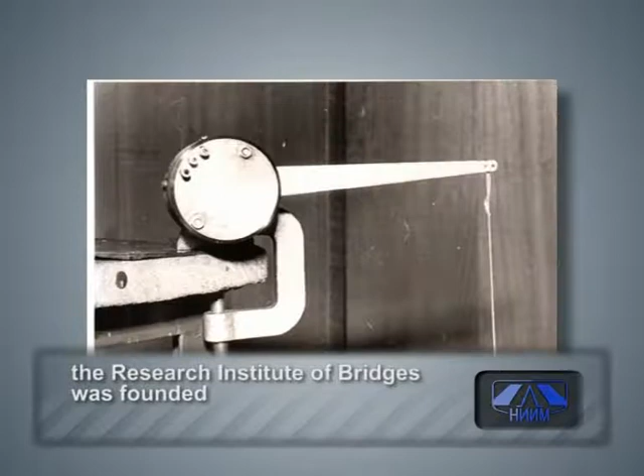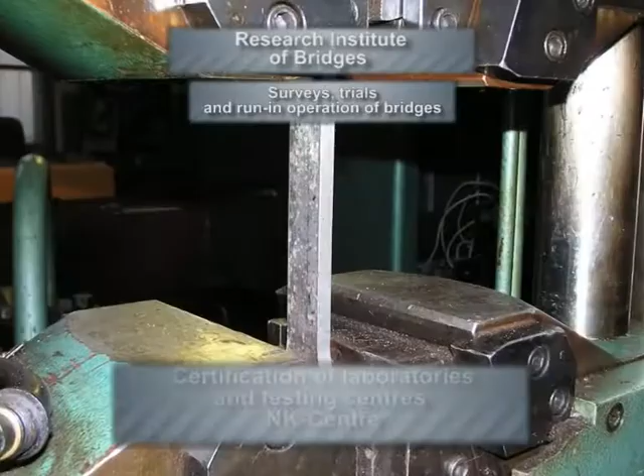Today, the Research Institute of Bridges is one of the leading experts in the industry with multi-profile activities. The Institute has modern laboratories and unique equipment promoting high level of the researches and developments as held in designs, operation and construction of the engineering structures, creation and expertise of the methods, facilities and technologies for non-destructive testing of welds and critical structures in railroads.

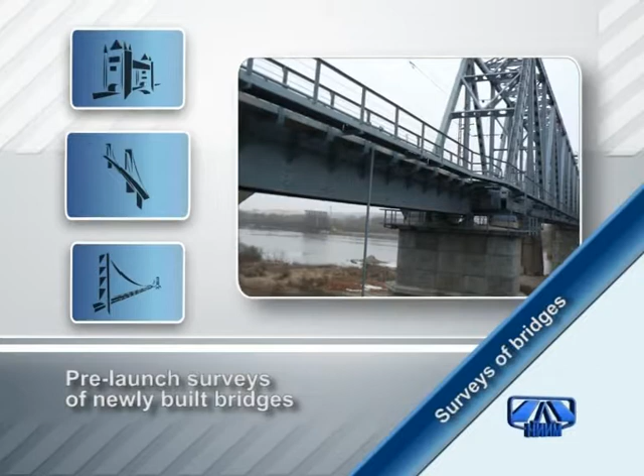The field works to survey and test bridges, diagnosing and expertise of the engineering structures require ultimate concentration from the employees. Future safe operation of the structure depends on the modern equipment and people's teamwork.

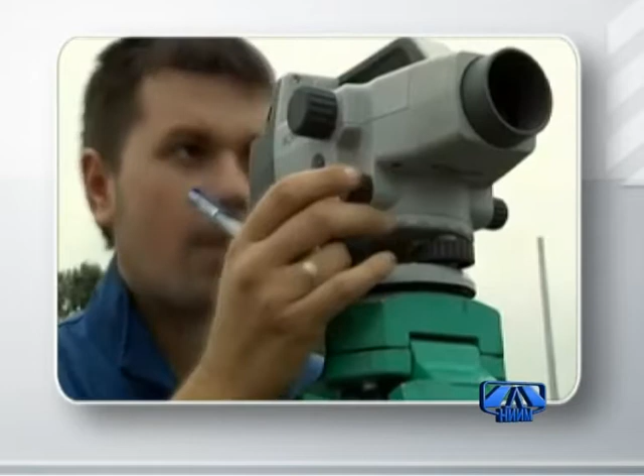Since its establishment, the Research Institute of Bridges has got 37 patents for the methods and devices to base innovative equipments and technologies intended for diagnosing of engineering structures and non-destructive testing of the rolling stock and railroad infrastructure parts and components.

The Institute has developed the main industrial regulations for application arrangement and technology of non-destructive checking applied in repair of the railway cars and operation of railway equipments.

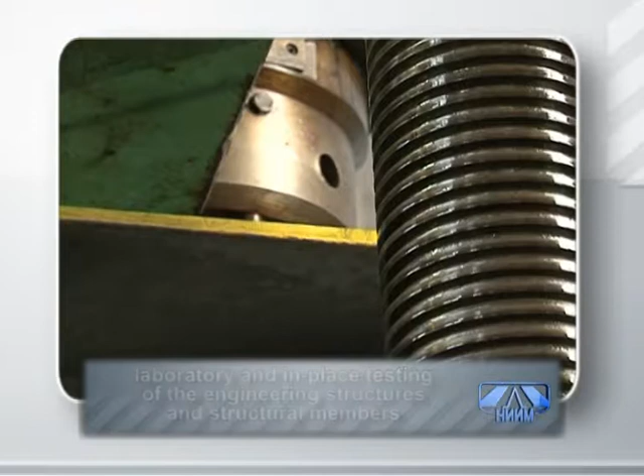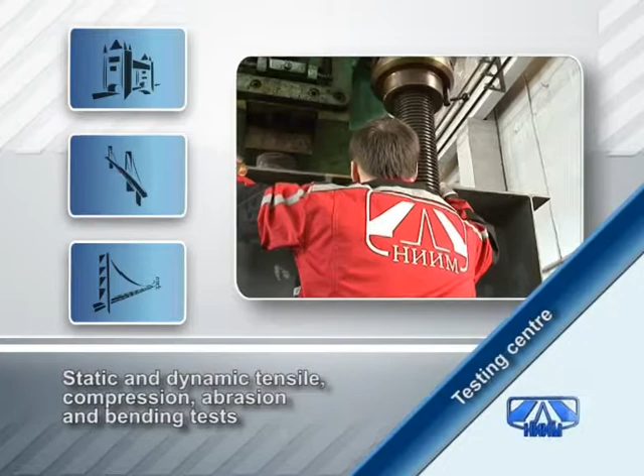In the laboratories of the Research Institute of Bridges, the elements of railway cars, truck structure, structural parts including large-scale superstructure fragments are tested for static and dynamic loads. Seismic resistance, brittle fracture, including that under sub-zero weather, stressed and deformed conditions are studied as well as fatigue developing under such conditions. The data received bases the subsequent engineering calculations.

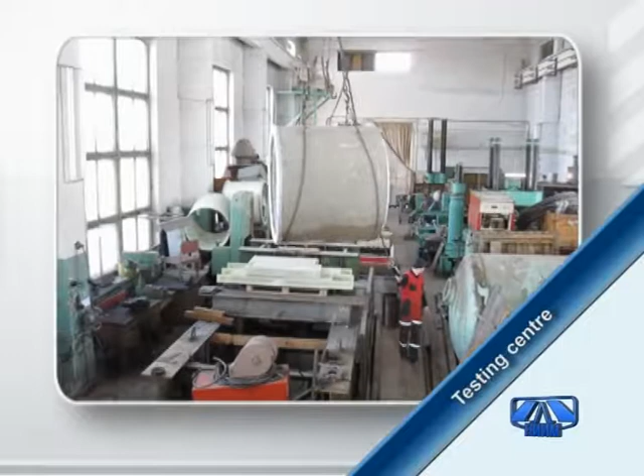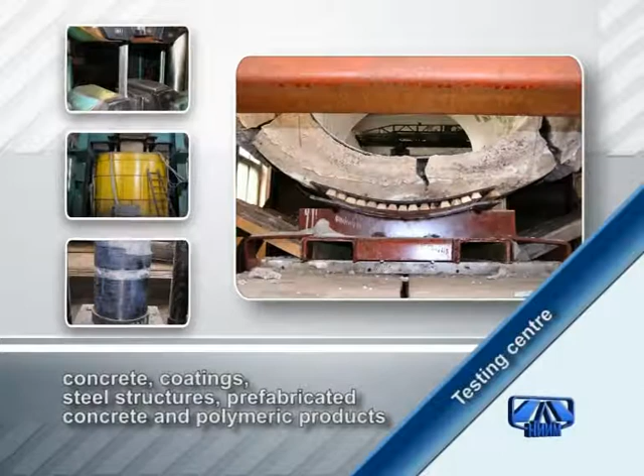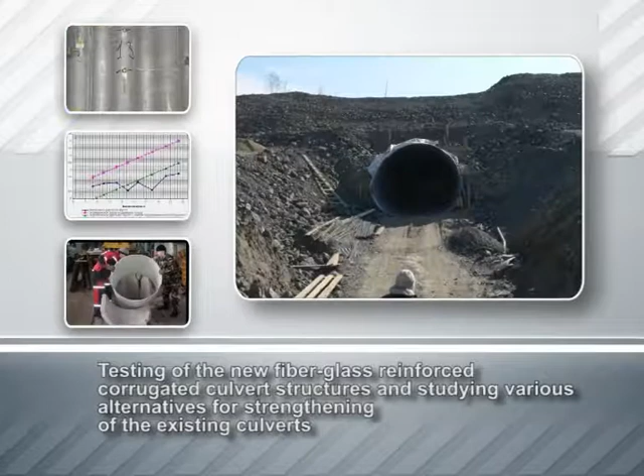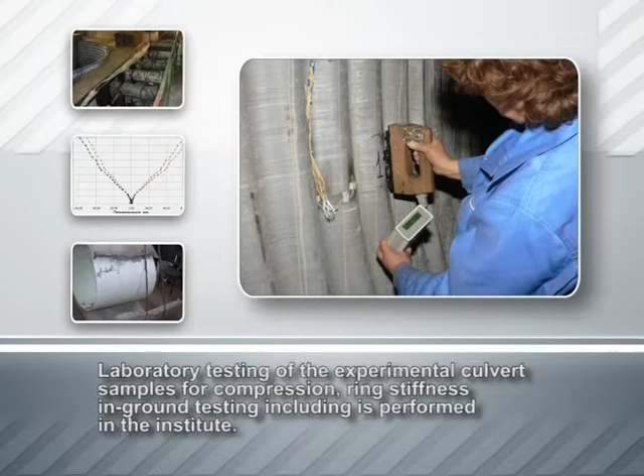Testing of the new fiberglass reinforced corrugated culvert structure and studying various alternatives for strengthening of the existing culverts using innovative methods make another area of the Institute's activities. Laboratory testing of the experimental culvert samples for compression, ring stiffness, including in-ground testing, is performed in the Institute. As the result, recommendations and technical requirements for application of the modern composite structures are developed.

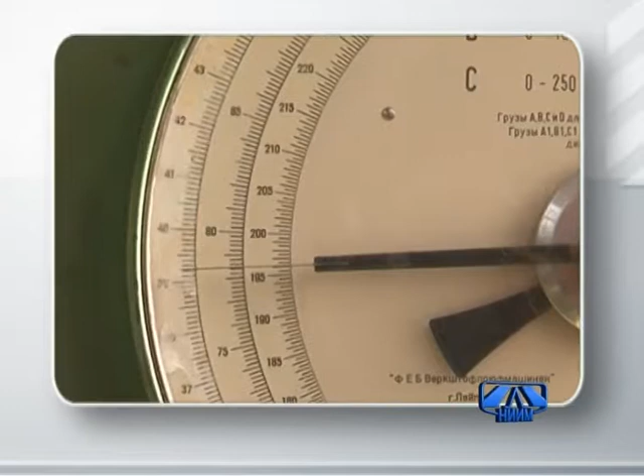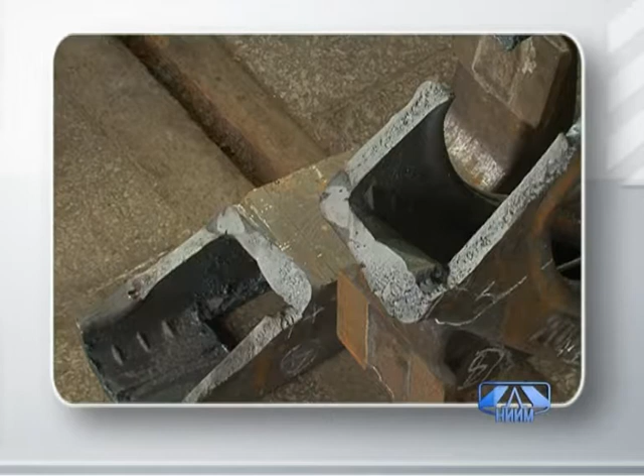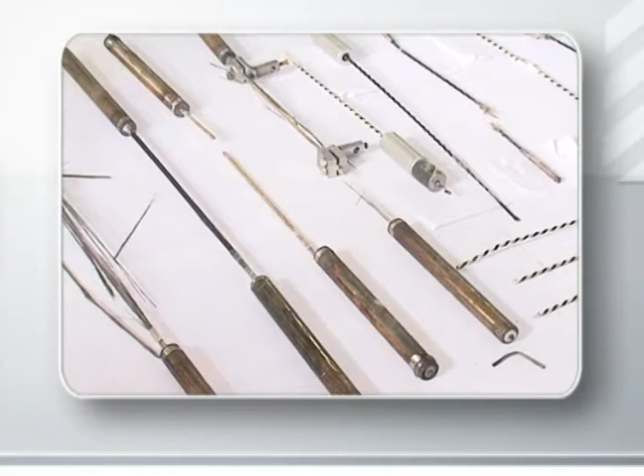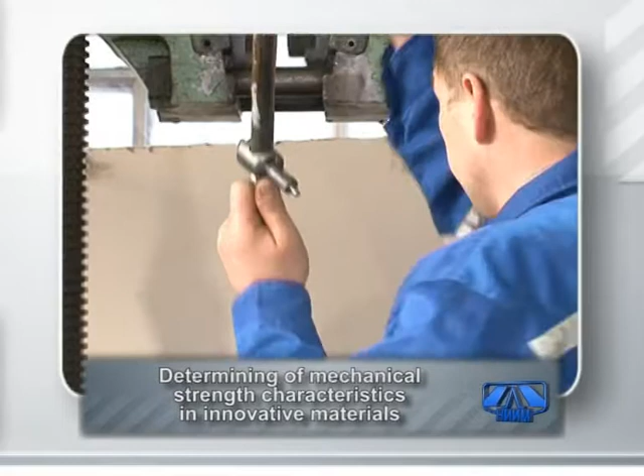The Research Institute of Bridges performs all types of mechanical testing, chemical analysis, metallography, frost-resistant testing for most of the materials as used in modern construction works, including the composite and polymeric ones. Much attention is devoted to the composite reinforcement properties studies.

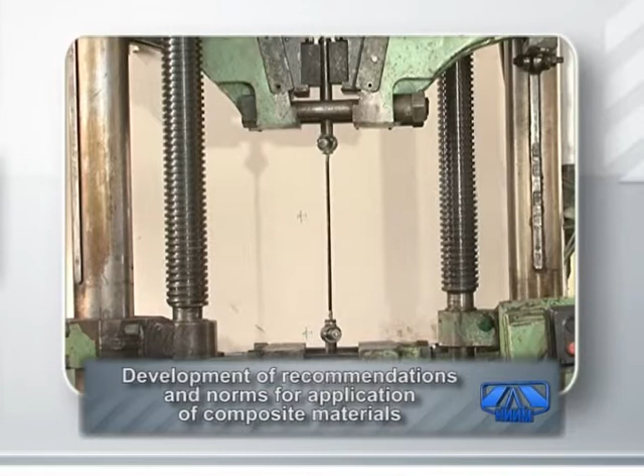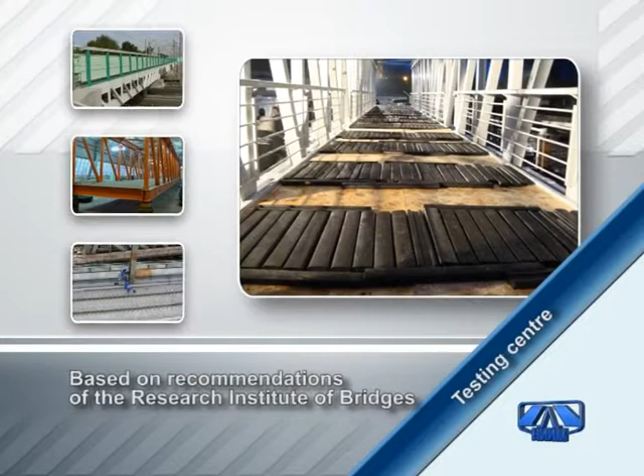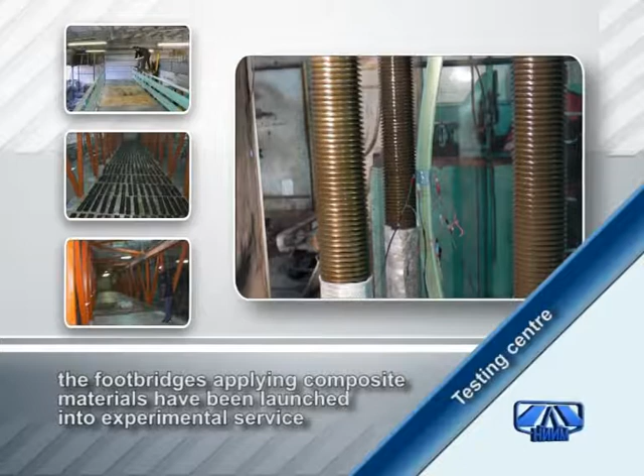Since 1999, the Research Institute of Bridges has been engaged in studying applications of composite materials in bridge building. Together with NPP APATEC, we have developed regulations, performed studies, and implemented the first in Russia composite footbridge projects.

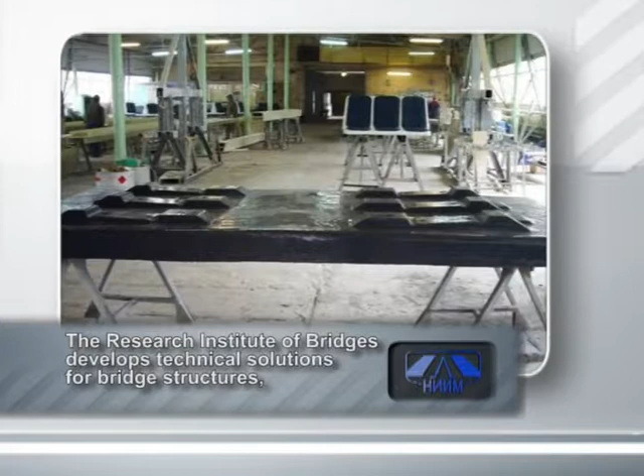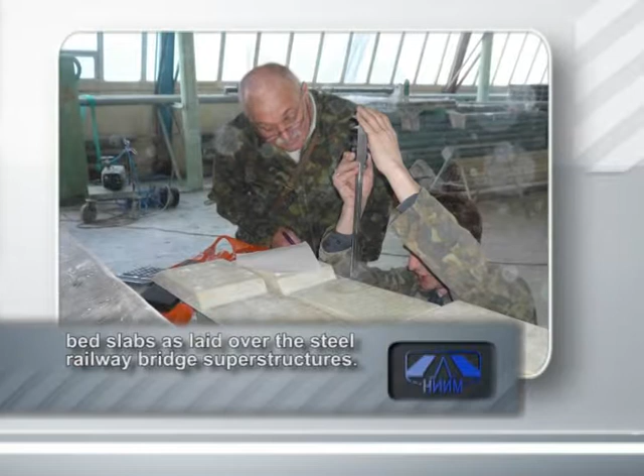The Research Institute of Bridges develops technical solutions for bridge structures, railway sleepers, and composite ballastless bridge bed slabs as laid over the steel railway bridge superstructures. The sections of ballastless bridge bed have been tested for strength, stiffness, and durability.

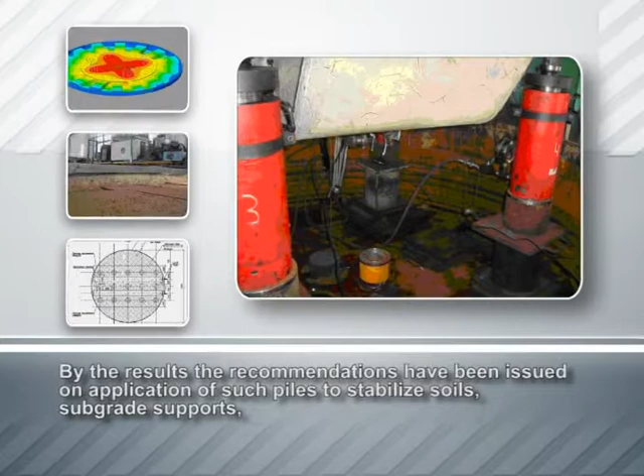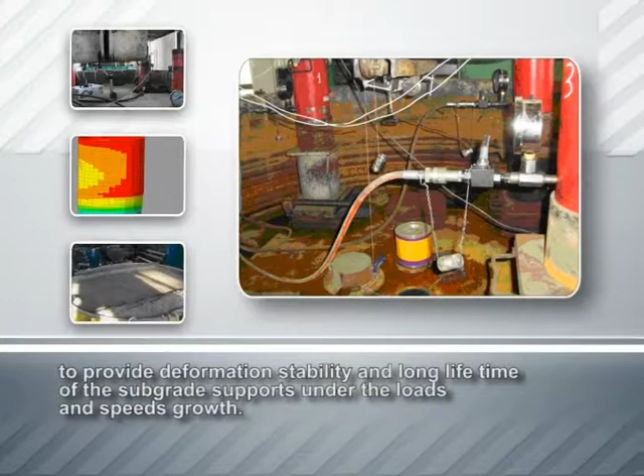In 2011, the Institute performed the high-priority work on testing the geotextile shielded sand piles. By the results, recommendations have been issued on application of such piles to stabilize soil subgrade supports, to provide deformation stability and long lifetime of the subgrade supports under the loads and speeds growth.

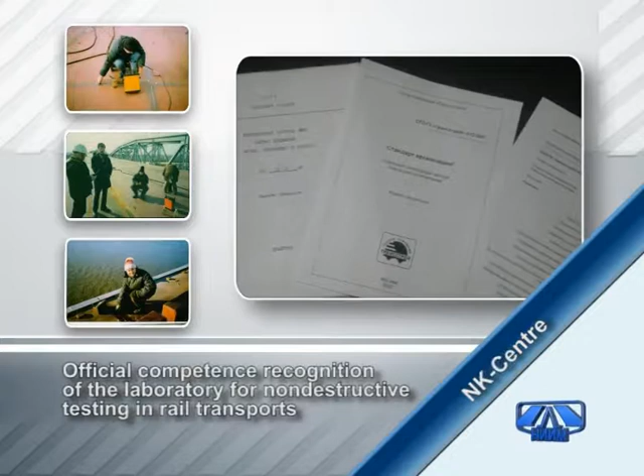Creation, improvement, and implementation of the ultrasound non-destructive check methods and facilities in the railway sector practices is one of the main Institute's activities. Within the Research Institute of Bridges, there are special laboratory departments for non-destructive checking of railway sleepers and rolling stock elements.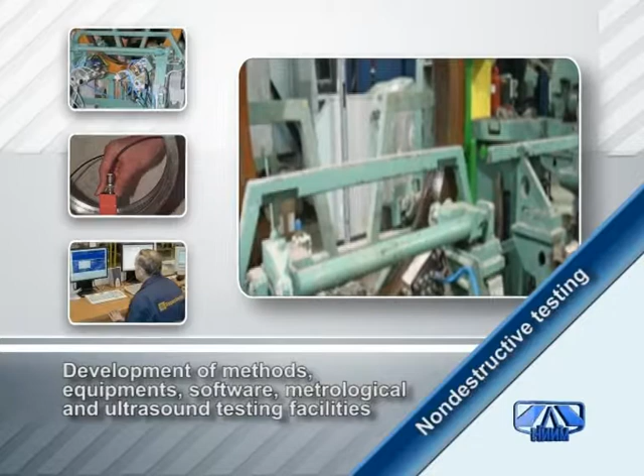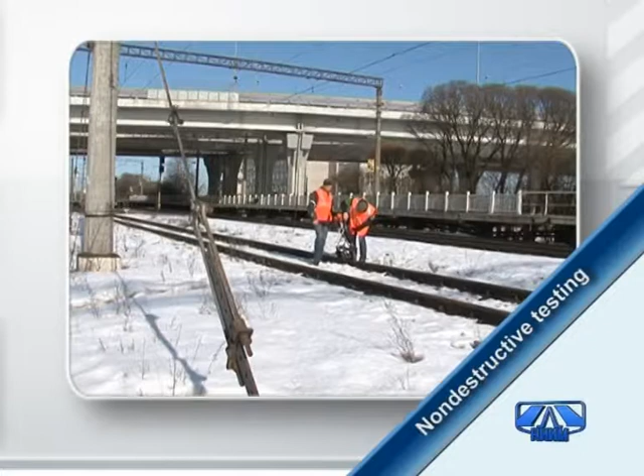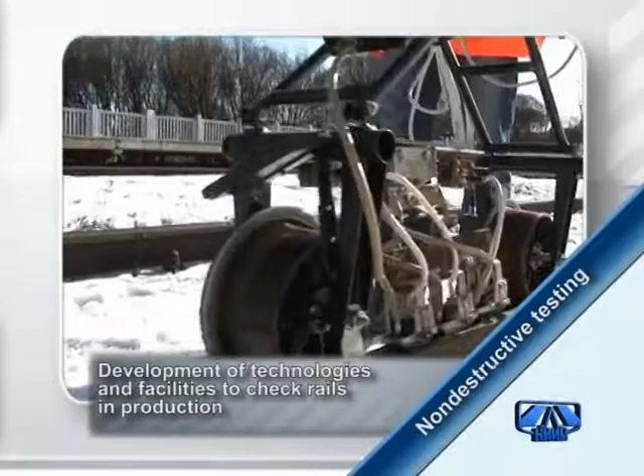The Institute has originated the principles and techniques for non-destructive checking of railway sleepers, participated in development of the ultrasonic detectors' main types, as well as initiated the developed and automated data processing computer systems to support decision-making on the non-destructive checking of rails.

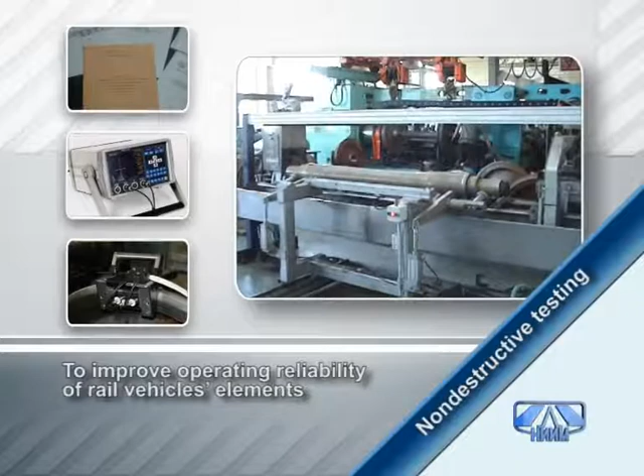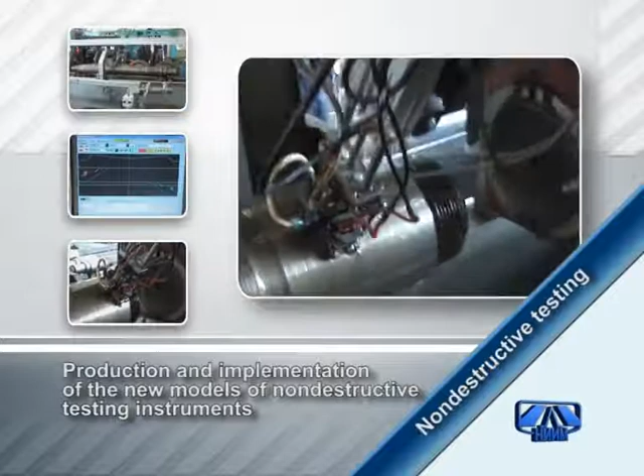The Research Institute of Bridges headed development and implementation of various mechanized and automated devices to check the rolling stock parts during manufacturing and repair processes. They include the railroad wheel treads ultrasonic checking device, the wheel set axle automated checking device, etc.

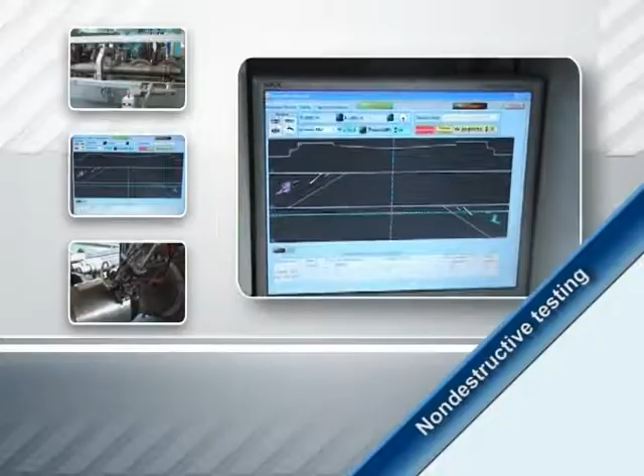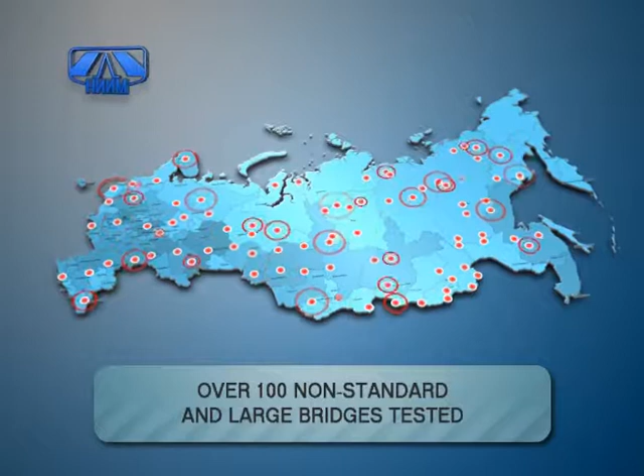During its long history, the Institute has proved to be a reliable business partner, providing objectiveness and high quality of its services. The Research Institute of Bridges has a high scientific and technical potential, business connections, and reputation, which allows meeting complex challenges in Russia and abroad.